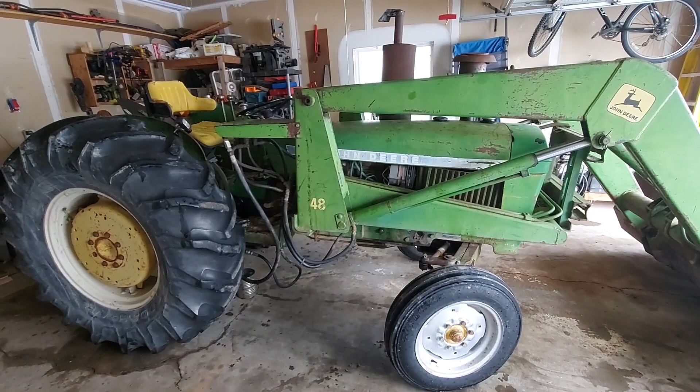Welcome back, everyone. Today we're working on the John Deere 2240. I changed out the hydraulic oil filter for this because it's regular maintenance, and put a new filter in.

Then there's an O-ring that goes on top there. Didn't seem to quite fit on there. Let me show you what I'm talking about here.

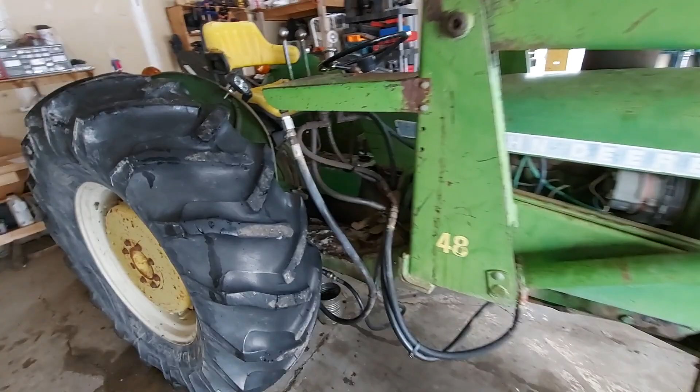So this is the filter housing here, filter cover, and filters in there. This bolt goes all the way through. It has this port on the side for the hydraulics to go into. It has an O-ring up there, a real big O-ring that goes around the top of there.

But I don't know if I just didn't get it seated right or what. Gotta take it back off and see if I can fix that somehow.

Now when I got this loader, this had a plug in this right here, instead of this piece. And you have to buy this piece separate, or extra, whatever, to fit into here.

And then get a hydraulic fitting that'll fit on that, and then all the other fittings go from there. If you don't have it, there's no hydraulic threads in here. I've tried every piece I could find to fit those threads. There's nothing that fits that. They're like some special threads that go into there. So you have to have this piece. It's proprietary, that type of stuff.

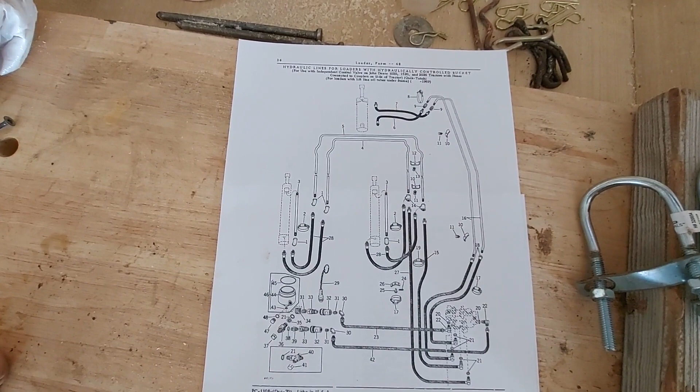So I'll show you what these parts are. This is from the John Deere 48 loader parts catalog, parts manual. This is the housing here.

That's the O-ring that's up there that's leaking. And then there's your port, and that's the plug that goes in there. That's what came with it, just that plug. I'll show you that plug.

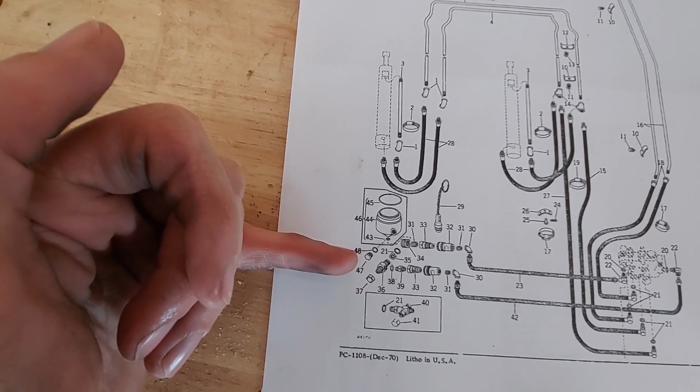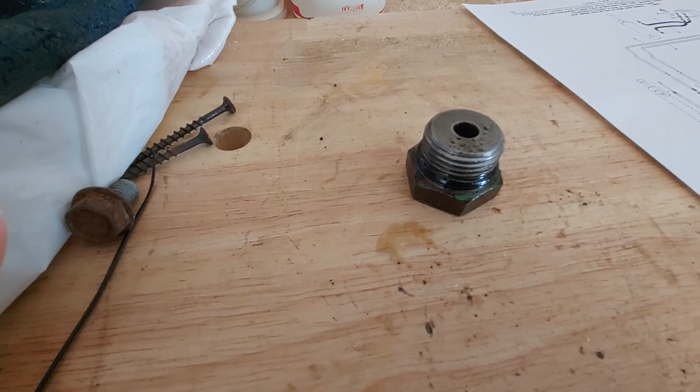So this is the plug that was in there, and that's the kind of threads that are on there. It's what they call a boss with an O-ring style fitting. I mean, yeah, they do make those, but they don't make it in that thread type because they made a proprietary type thing there.

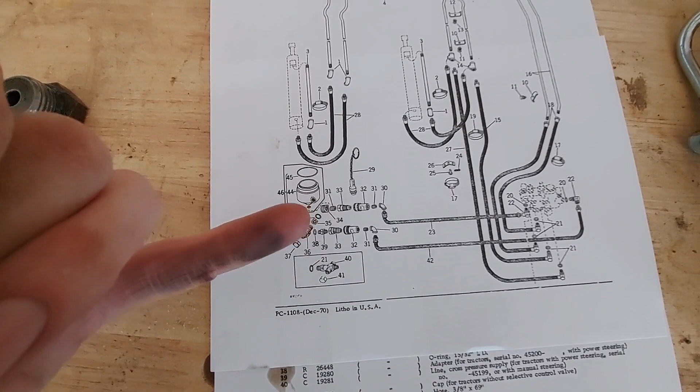Anyway, so talking about that parts catalog, this housing is the 46, which would be AT30197, the oil filter cover with return port. And then that fitting is 36, which is C18679 here.

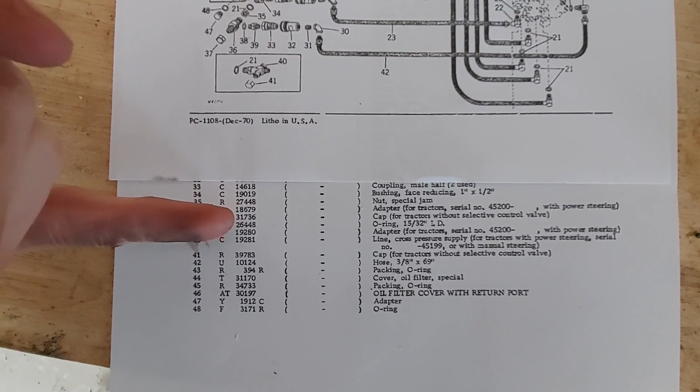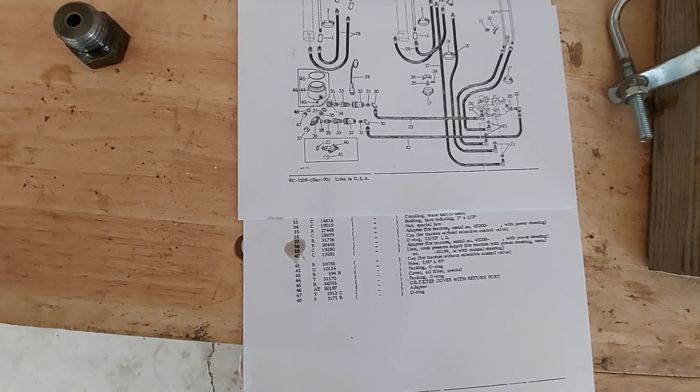And that's the adapter for tractors with power steering. That's the piece I had to buy, and that cost about maybe $25 to $30. Then you have to buy the hydraulic fitting that fits that, and then go back down to regular, whatever. Kind of a mess, but that is what it is, and that's what they made.

So that's what we're working on. Hopefully I can show you this. I don't know where to put the camera so you can see. I'm gonna have that bucket there to catch all the stuff. Get this hydraulic line off out of the way.

Let's see if we can get this thing off. I tried tightening it up to see if it would tighten, but it didn't want to. Can't twist it with the hands because there's so much weight on it. There she goes, okay.

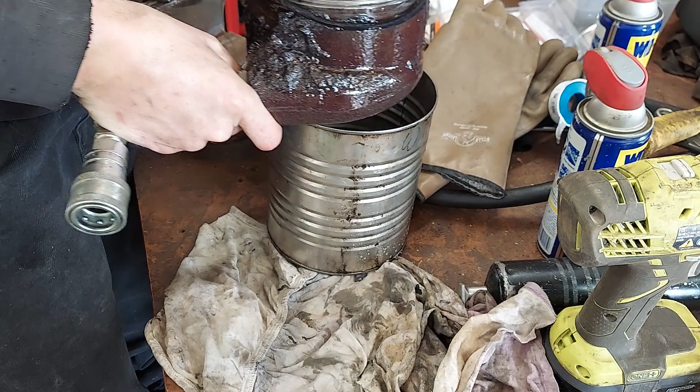There's the filter. We'll dump the oil out. Bottom.

This is the gasket that's supposed to go around there. And when I bought it, it seemed too big. Let me show you that. It'll sit there. See? Pull the sides, see that? Well, that's pushed all the way in, around there. It seems too big.

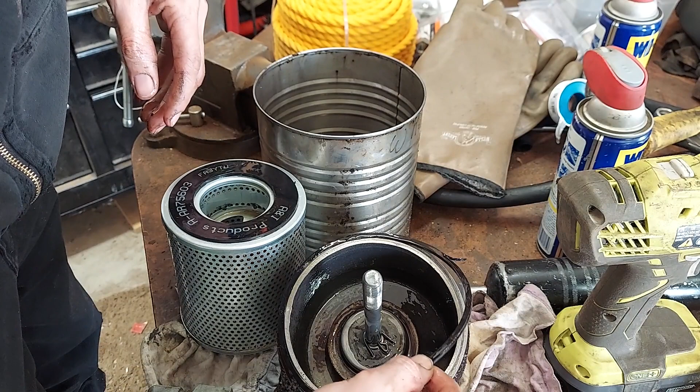So I'm going to take this piece up to the parts store, see if I can get one that might be the right size. This is off Amazon, and it's just too big. Could you make one out of gasket material, you think? I don't know, I just know that one's way too big.

So we will go and see if we can find a smaller one that actually fits. See, that's pushed in all the way, and there's just too much there. So I think what happened is it folded over, and all the fluid's running out, you know?

Frustrating. I even pinched it and peeled some off, and I thought, oh, it'll be fine. Ha, little did I know—it didn't work.

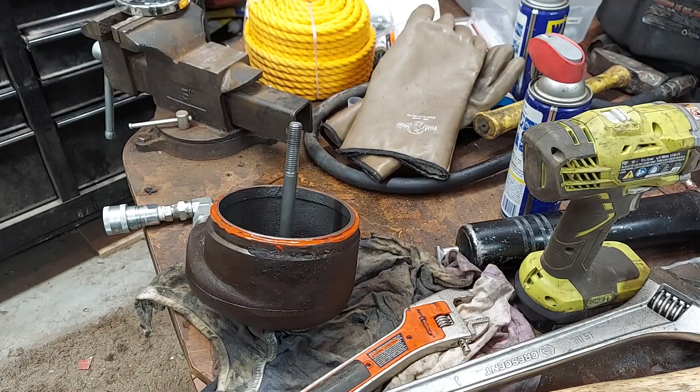So we'll give this a try. You take this packing—this is the old one—and you put it on here. And it's too big, right?

It's too big. But if you take that same packing and put it up in the housing, I'll show you that picture right now. Put it up in the housing, works fine. Seat's fine up in there.

But for whatever reason, you can't go this way—it'll fold over on you. So that's the trick: stick it up in the housing. Call her good. So I'm gonna work on getting this on, getting it started.

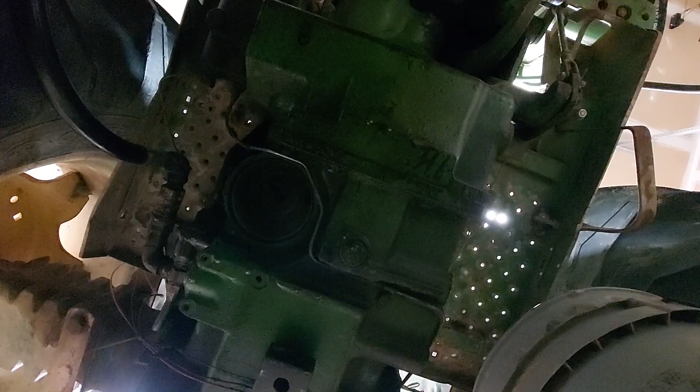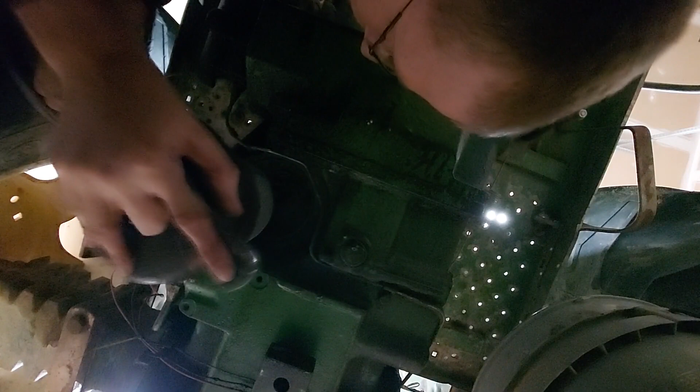Let's turn it. Can't spin that bolt in there with your fingers. Let's see, I think it started. Feels like it's going straight. I'll turn it just a tad right there.

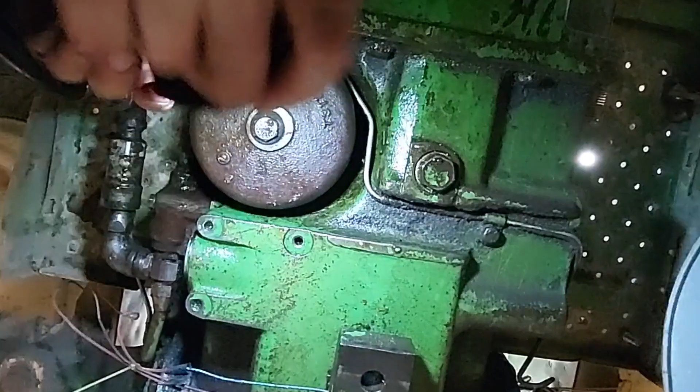Go get a flashlight to see what we're doing. I think it seems okay. Hope you can see some of this. Anyway.

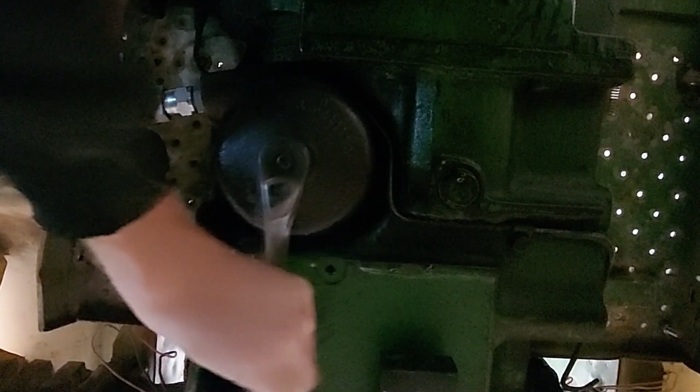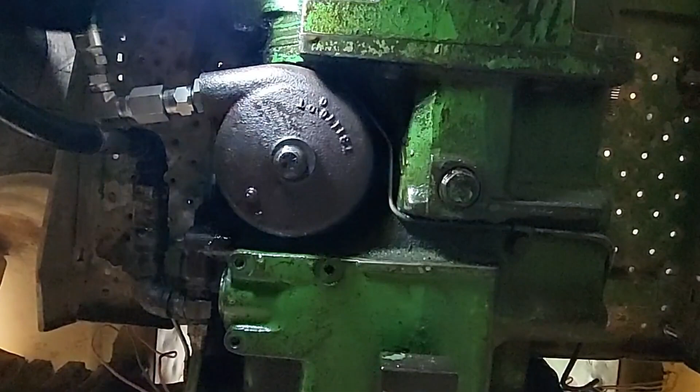I sure hope this seals, that's all I gotta say. Crank that down. I think everything went in. Let's see, gasket hanging out—of course, I didn't really check on it last time.

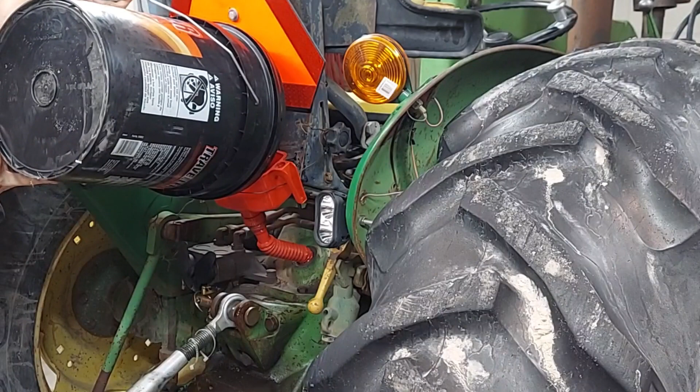Okay, now we're gonna fill this tractor back up. There we go, Hy-Tran. This tractor calls for Hy-Tran, so we'll fill it up with Hy-Tran, but I don't have the expensive stuff, just the cheap old Tractor Supply stuff. That's what it takes, so we'll put this in it.

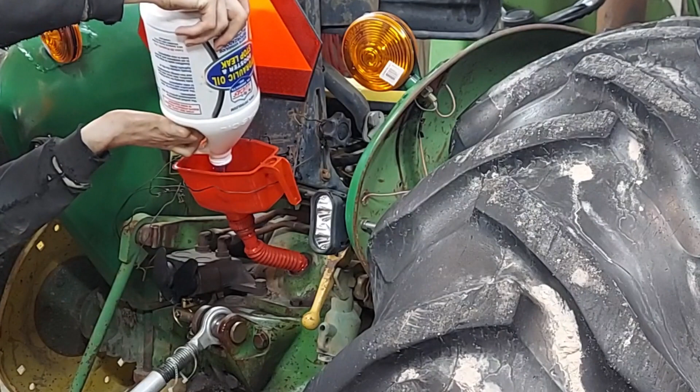Hopefully it should work good. I got some additive to add to it also. This stuff I'm adding here is Lucas hydraulic oil booster and stop leak.

I don't want to be too fast there. It says it adds life to pumps, rams, and seals while also adding lubricity and thermal stability to hydraulic oil. Renews hydraulic fluid with additives that stop seal leaks, boost pressure, reduce operating temperatures, and increase the life of hoses, rams, and cylinders. This product will restore full hydraulic pressure to worn systems. It's an inexpensive solution to most hydraulic problems and a perfect preventative maintenance product.

It says you add 10% to your system. Let's see—yeah, use approximately 10% to stop slips, leaks, rough shifting, and overheating, up to 30% in worn units. For construction equipment, use approximately 5 to 10% for preventative maintenance.

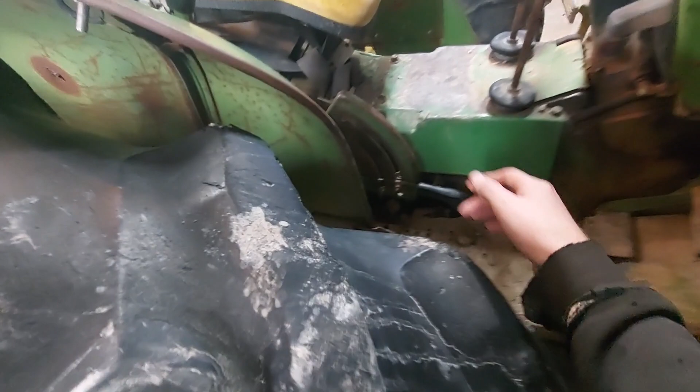So we're going to check the fluid on this. We filled it up a little ways. And how you do that, there's a knob down here—I don't even know if you can see it. It's way down underneath here, at the tip of my finger. So it's that plug right there. Well, plug—that's the cap for the dipstick.

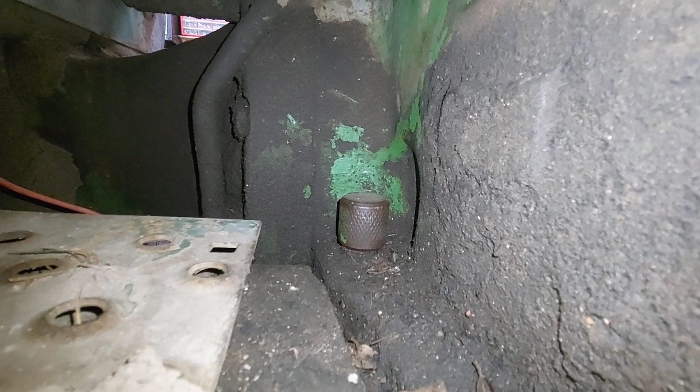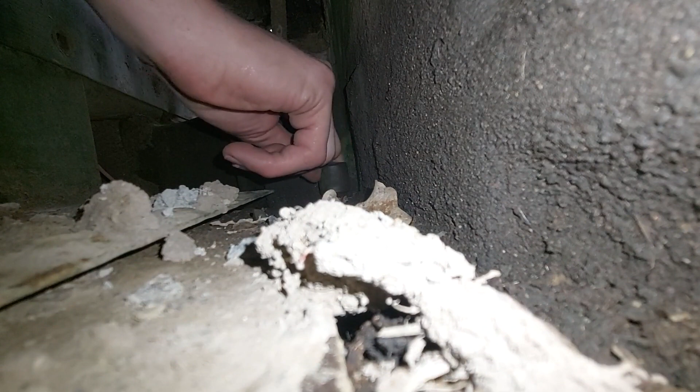See if I can set you somewhere so you can see what's going on. Okay, so it's very inconvenient to get to. They say you gotta set this on top of the threads—the manual says set this on top of the threads. You have the tractor at a low idle to check that.

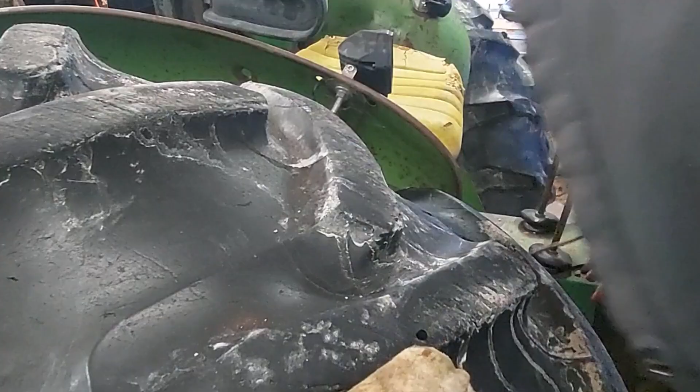Said low idle, that's as low as she'll go. Tractor needs a little bit more, right? You can see it or not, it's right there. I'll fill it to the top line myself.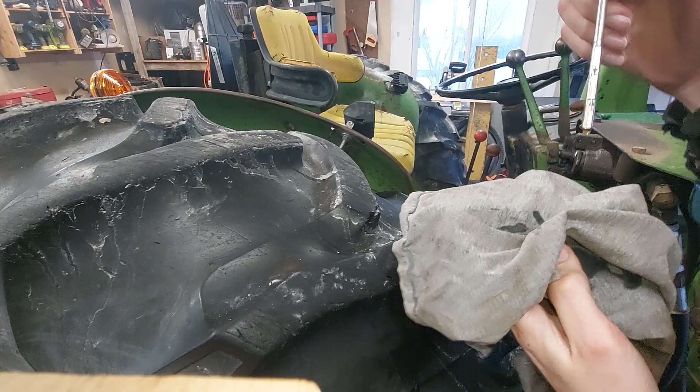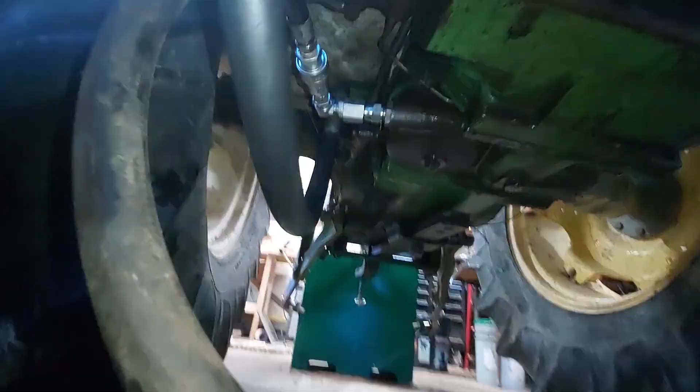Well, I think we got her, we got her all the way full. I don't know if you can see that or not, right at the top. I'm seeing a leak right down the front—that's not good. I don't know if that was just residual or from something else, what that's from.

Well, there you have it, all put back together. I did leave it out for a day or two with some cardboard underneath it to see if it was still leaking. Not much came out of it, so I'm going to call it good for now.